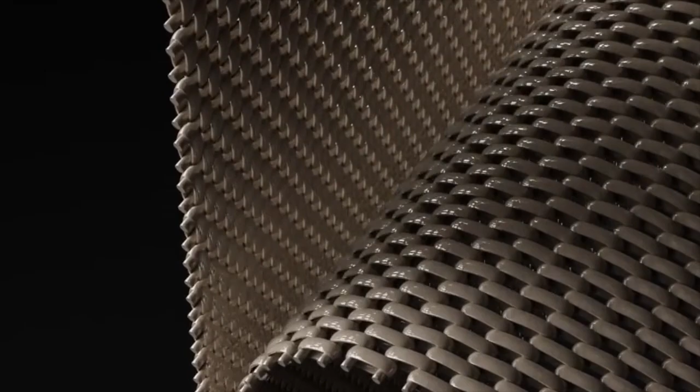Kinetika, the new and patented technique of dynamic washing. Continuous fabric washing represents an important process both in terms of technological purposes and in the aspect of water, chemical, and energy consumption.

There are different types of machines that we can call traditional, in which the fabric transits inside washing modules, or tanks placed one after the other, along a path consisting of small diameter rollers or larger diameter drums. Washing is done using the immersion technique, also adopting simple low-pressure water sprays or waterfalls, which continuously wet the fabric.

To prevent wrinkling or displacement of the fabric within the washing modules, it is necessary to limit the impact force and speed with which the washing fluids interact with the fabric. Analyzing in detail the exchange phenomenon, which corresponds to the ratio of mass of washing fluid to mass of fabric to be washed, we see a low process efficiency related to the sliding and stratification of the fluid around or on the surface of the fabric.

In other words, even if a high amount of recirculating or countercurrent fluid is pumped, the effective penetration and crossing, which is the basis of washing for the elimination of the products to be removed from the fabric, is limited, thus requiring the use of numerous washing tanks or modules that result in proportionate consumption.

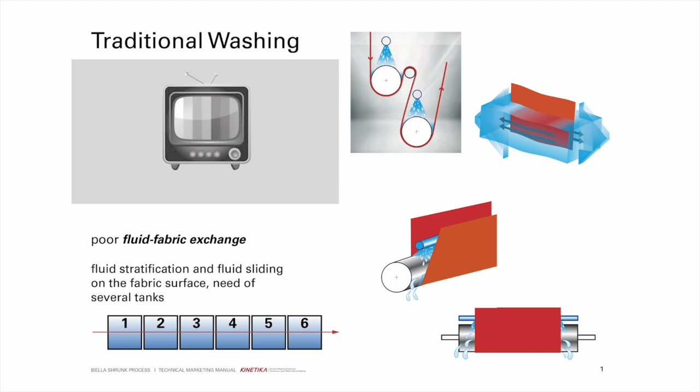A new patented washing technique, Kinetika, is based on a revolutionary and disruptive concept that is defined as dynamic washing. The term dynamic is derived from the speed and pressure of the washing fluid. In Kinetika, there are over 700 spray nozzles mounted on perforated bars that are fed by special recirculation pumps. The pumps are capable of generating a pressure of up to 10 bar so that the jets impact the fabric at a speed of up to 32 meters per second.

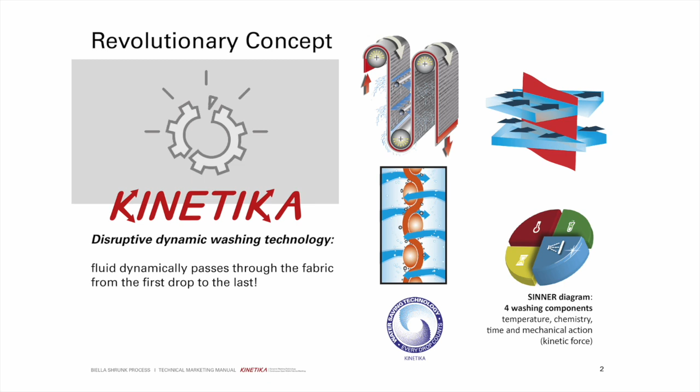To make this new technique possible, the fabric, despite the forces acting and discharging on it, must be kept in a planar shape to avoid creases, stretching, or any other deformation. For this purpose, there are 2 permeable transport belts that accompany the fabric along the washing path. The conveyor belts have an invisible joint and high water permeability that does not reduce the beneficial effect of the kinetic force of the high-pressure fluid. With this patented technique, every single drop of recirculated fluid actually interacts with the fabric by passing through it.

The washing sequence. In the Kinetika module, high-pressure washing of the fabric takes place in the upper section, above the lower section consisting of the 2 fluid collection tanks. The process is divided into 3 stages that are followed in rapid sequence: washing, pre-rinse, and rinsing. The Kinetika module is in fact equipped with 3 pumps that perform as many functions.

The yellow-colored pump recirculates and feeds the 10 wash bars. The purple-colored pump recirculates and feeds the 4 pre-rinse bars. The blue-colored pump is connected with the clean water pipe and feeds the last 2 rinse bars. The nozzle arrangement calls for high-pressure sprays to be arranged on both sides of the fabric. Finally, the last 4 wash bars acting alternately on the 2 opposite surfaces.

The pre-rinse phase is handled by 4 bars in alternating positions on the 2 sides of the fabric. The final rinse phase with clean water is entrusted to the last 2 bars installed near the exit of the wash path, just before the fabric leaves the conveyor belts.

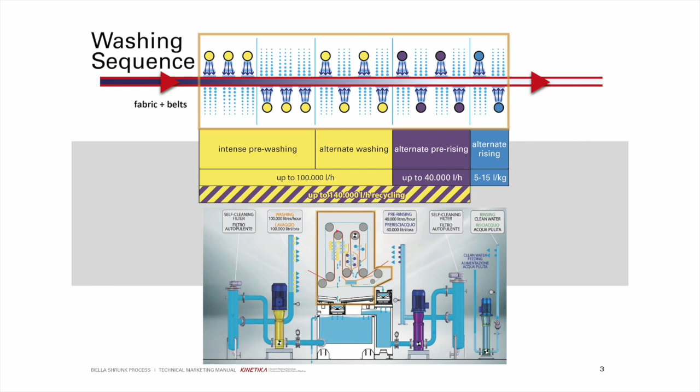Permeable conveyor belt. Permeable conveyor belts are essential to enable the combination of maximum washing power with maximum protection to prevent fabric problems such as creases and stretching. The two belts are made with a high permeability spiral weave structure, which leaves no marks on the fabric.

It is possible to choose from a variety of weave types due to the fact that these belts are routinely used for industrial filtration processes, so there are a variety of types that are easily available and competitively priced.

The two belts have a long service life, several million meters processed, and are washed continuously along with the fabric, so they do not become soiled with debris and are not subject to absorbing color or other substances discharged from washed fabrics. The transport and protective actions of the belts ensure that there are no problems with stretching, creases, abrasions, selvage curling, etc. Replacing the belts requires only a few hours of work and is a simple operation that can be performed by any trained technician.

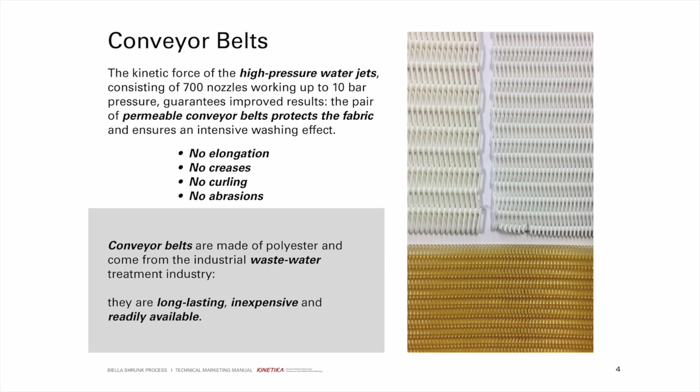Fluid filtration. The presence of 700 spray nozzles in Kinetika washing module requires an adequate filtration system for the recirculated fluids. To prevent the nozzles from getting dirty, 3 filtration systems are provided. The first consists of 2 rotating belts that are positioned at the base of the high-pressure washing module. They intercept the passage of fluid that, by gravity, falls from the nozzles to the collection tanks below.

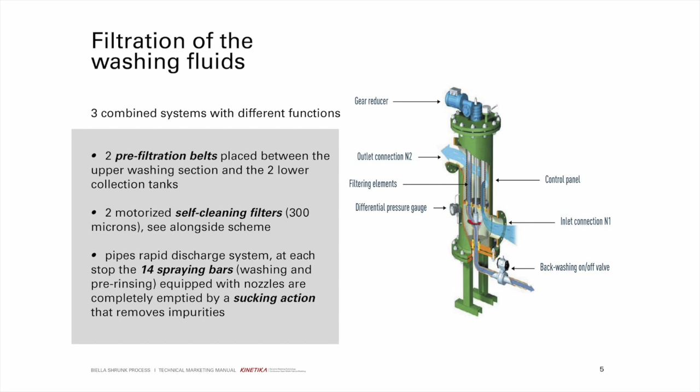The second consists of 2 self-cleaning motorized filters equipped with a mesh cartridge with 300-micron holes. The 2 filters are equipped with an internal rotating system with suction blades that automatically intervene in a timed manner. The third is made up of a pipe drainage system that automatically intervenes at each machine stop. A drainage device creates a vacuum effect inside the nozzle bars that removes any dirt deposit.

A new concept that proposes a radical change in the principle of fabric washing. The innovations introduced by the new and patented Kinetika washing module combine in a synergy of factors. Up to 140,000 liters per hour of recirculated and filtered fluids flowing through the fabric, from the first to the last spray droplet. The kinetic force that achieves an exchange between fluid mass and fabric mass that is unparalleled. The fabric transport conditions via the 2 permeable belts that allow tension-free and crease-free processes, even on delicate fabrics.

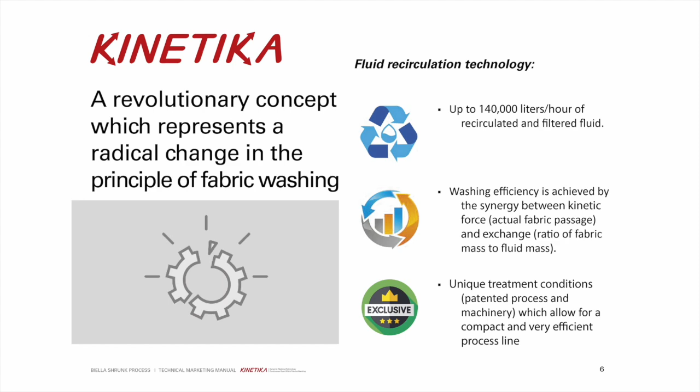Compactness of size is not a limit for performance. Washing, pre-rinsing, and rinsing are concentrated in the dynamic washing module. Washing fluid is recirculated and filtered by a pump capable of feeding up to 100,000 liters per hour through a hydraulic circuit that feeds as many as 10 nozzle bars. Pre-rinsing uses the fluid collected in the second smaller tank located toward the outlet that is continuously fed by clean water. A dedicated pump, connected to an independent hydraulic circuit, feeds 4 nozzle bars.

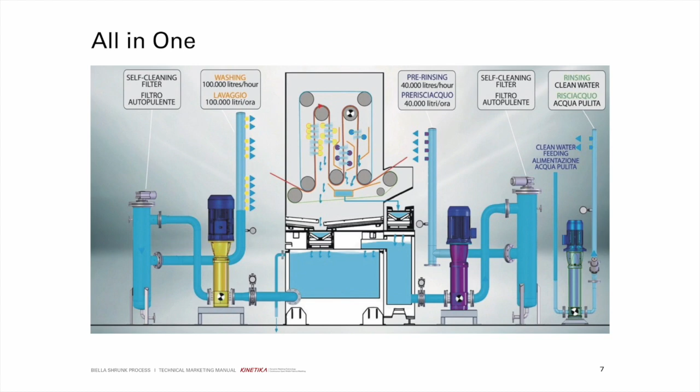The last rinsing operation is done by a third independent circuit fed with clean water that is delivered by 2 nozzle bars. By means of steam heat exchangers, it is possible to heat the washing fluids independently. It is also possible to wash fabrics with superheated water at the rate of 30 meters per minute speed, which corresponds to 1,800 meters per hour. Every single meter of fabric is washed with 77 liters of fluid. In fact, dividing 140,000 liters per hour by 1,800 meters per hour yields the amazing result of 77 liters per meter.

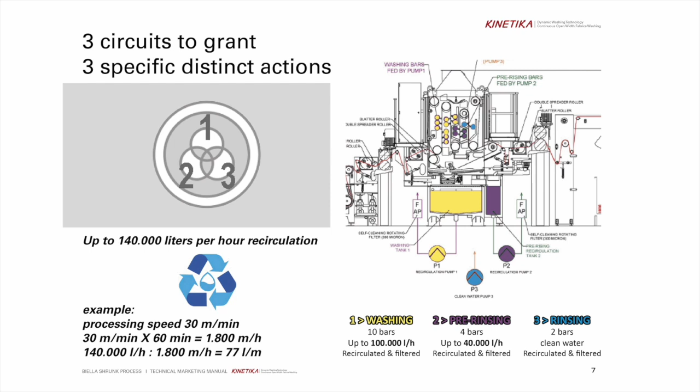Performance comparison. Kinetika washing results were measured and evaluated through hundreds of laboratory tests using the Soxhlet extraction method. 3 different types of solvents were used: ethyl alcohol, petroleum ether, and acetone. By comparing the values obtained from the samples washed with Kinetika with the values obtained from the samples washed with other traditional equipment, it can be seen that the potential of Kinetika is equal to or greater than that of much more complex and larger traditional machinery.

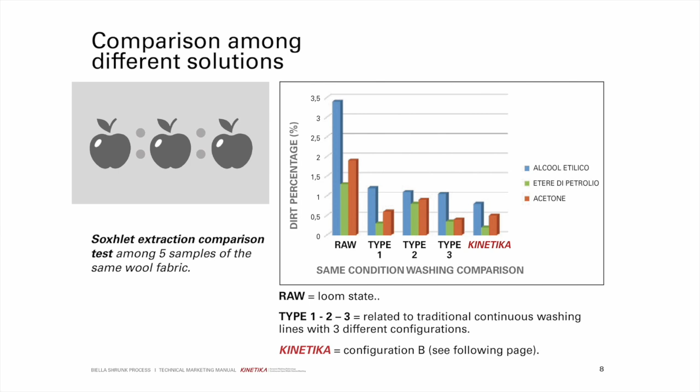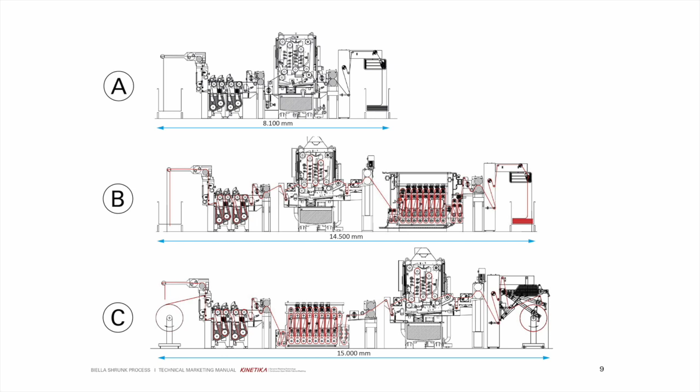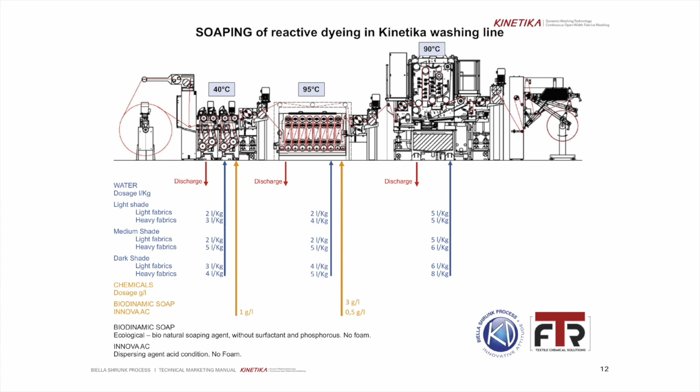Different configurations for different results. Kinetika can be used to perform different washing processes: desizing, post-print or post-dye soaping, bleaching, deoiling, neutralization, etc. The Biella Shrunk Process Technical Department employs experienced process and textile chemistry technologists who are able to propose the ideal configuration and provide the after-sales technological support necessary to achieve results that guarantee quality and efficiency.

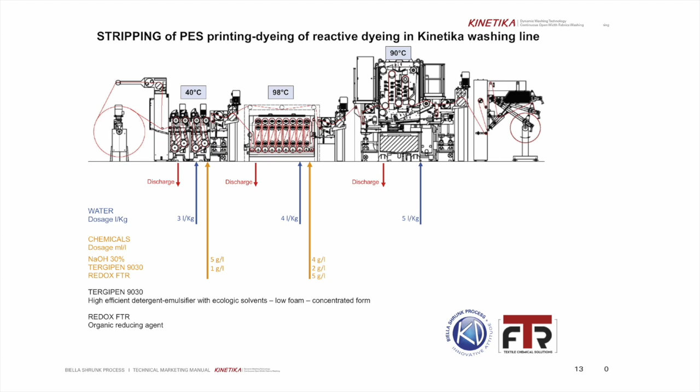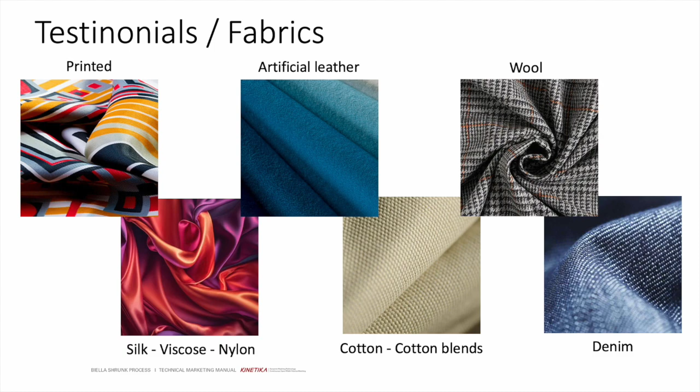Testimonials. There are now numerous customers who confirm the validity and versatility of the Kinetika project, which is adopted in the following areas: denim and cotton fabrics, cotton polyester and polyester viscose fabrics, wool, silk, cashmere, and linen fabrics for clothing and accessories, non-woven synthetic leather fabrics for car seats and upholstery, viscose fabrics and other man-made fibers for linings and sportswear.